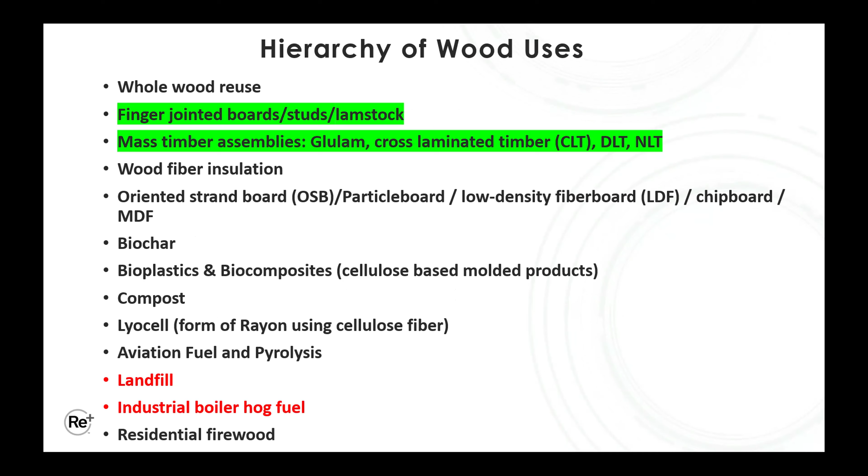Couldn't go to the next slide. So one of the things driving this really is the hierarchy of wood uses. You can see down in red at the bottom, most of the wood in our area currently is going to landfill and to industrial boiler hog fuel. We really want to see that material going to its highest and best use, which is whole wood reuse. Some of that is happening already.

There's some market issues, I guess, with widespread reuse of whole wood. We'll talk about that in a minute. So we're really spending more of our energy looking at ways to get wood finger jointed and made into studs or lamstock, and then into mass timber assemblies. We'll talk about that a little bit more too.

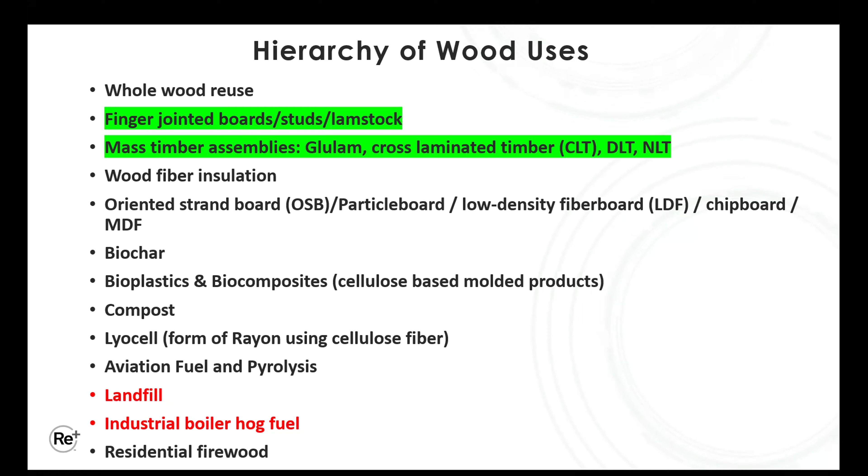So what's the opportunity? If you're trying to keep material out of the landfill, like we are in the King County Solid Waste Division, there's about 61,600 tons of clean wood that's ending up in landfill. We'd like to get that out of there and go into higher and better uses.

If you're trying to figure out where the material could go, we'd had some research done, and most of that clean wood that's going through the system is suitable for use in new building products once it's been processed. If you're looking at climate impacts overall in Seattle and King County, there's about 350,000 tons of clean wood going through the system every year.

That works out to about 1.01 million metric tons of carbon dioxide that would be eliminated through reuse, because almost all of that material right now is being either burned as fuel or landfilled. If you're looking at social cost of carbon, it's about $94, $95 million in value. If you're looking at the value of the wood, depending on how you price it and what the use is, somewhere around $70 million.

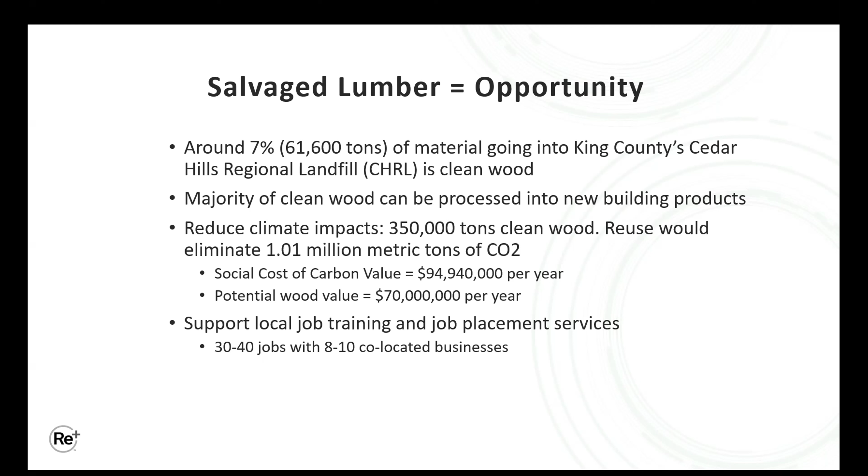And then there's a lot of jobs that could be created through transitioning to a circular economy for salvage lumber. Go to the next slide, Alex.

Here's a slide showing the circular economy for salvage lumber. Starting at the top right, you've got building deconstruction, then the basic lumber is pulled out of the buildings, and minimal processing happens initially. The wood would go to a salvage lumber warehouse. It could be finger jointed, then manufactured, and distributed back into construction.

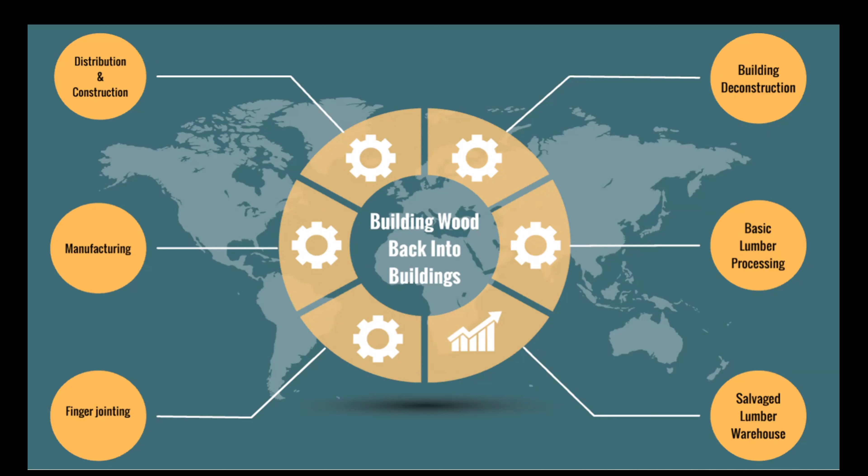I'll get back to you later on the methodologies for the carbon calculations, and I can make that available to anybody who's interested. Go ahead and go to the next slide.

One of the things I can go to is finger jointed material. There are some processes using stuff as short as 6 inches. We've been looking more in the 13 to 18-inch range. Go and hit the next button.

Once it's finger jointed, it can go into engineered wood products, mass timber assemblies, dowel laminated timber, etc. Going to go to the next slide.

So a few of the building blocks that have gotten us to where we are: clean wood is banned from disposal in King County and City of Seattle. We now have Washington State Building Code that allows for salvage lumber to be used without grade stamps, used at a lower grade.

Washington Building Code now encourages salvage assessments and deconstruction. There's language that permitting jurisdictions can adopt. There's a local deconstruction training program that King County has been doing. We're going to be doing the third round of that in March, probably, of this year.

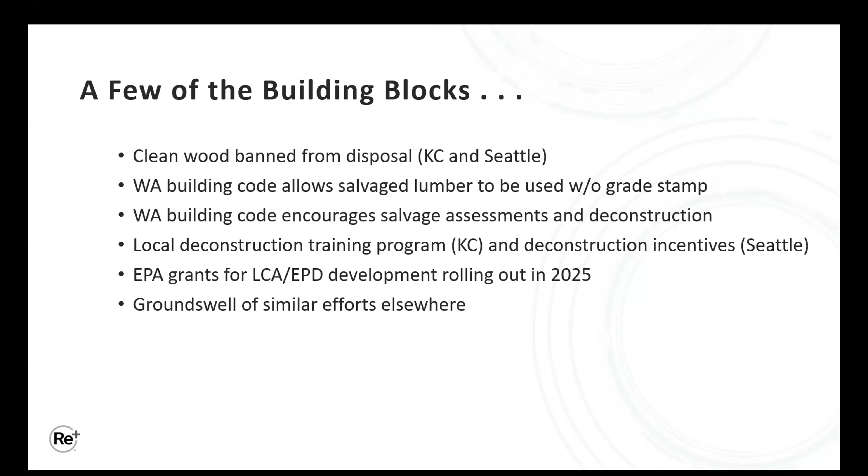Seattle has deconstruction incentives in place. EPA grants have rolled out and are now in place starting in 2025 for development of LCAs and EPDs - life cycle assessments and environmental product declarations. And there's a groundswell of similar efforts elsewhere. We won't go into a whole lot about that today, but there's a lot going on.

One of the big things happening is King County was awarded a grant from the EPA to work on decarbonization, and about 3.4 million of that is directly tagged for working on the circular economy for salvage lumber. Part of that is to hire a circular economy for salvage lumber senior project manager. We're going to be doing interviews next week.

There's money in there to develop grant programs to support these efforts, and also to develop sub-programs that support workforce development, product testing, and supporting manufacturers, primarily through grants for developing and supporting manufacturers of materials. There's also funding to work with development of environmental product declarations for new building products.

Next slide. City of Seattle got a solid waste infrastructure grant from the EPA for $4 million. The City of Seattle currently has requests for proposals out on the street. It's going to be a 3-year contract for about $4 million.

They're looking for somebody to collect, process grade inventory, and coordinate distribution of salvaged lumber, primarily recovered from residential structures, but it doesn't have to be. The city is expecting some outcomes.

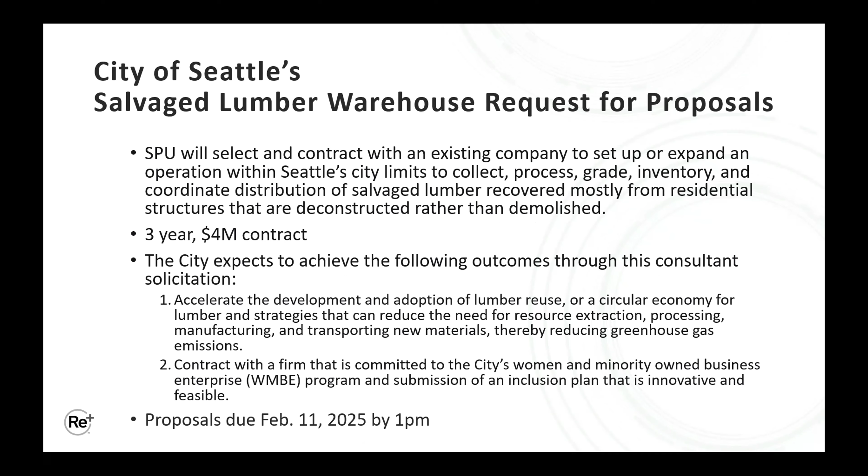Can go to the next slide. So, circular economy business park for salvaged lumber - this is a bigger concept that we want to make sure is on the table for today. The salvaged lumber warehouse basically works to get the lumber from the point it's harvested to the point where it could be used for something else. But if we can get co-location of a lot of these other businesses that are interested in utilizing wood or providing salvage lumber, the synergy will go a long way.

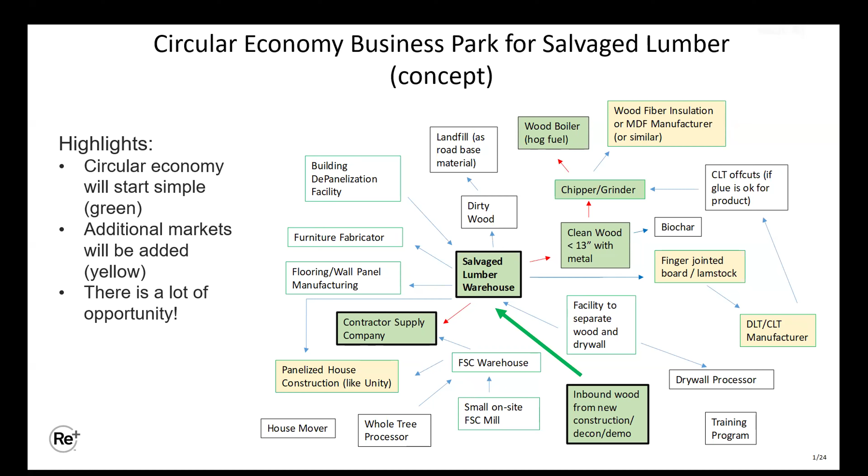You can see here in green would be a potential initial setup for the salvage lumber warehouse. Following that green arrow, they're just getting in lumber, and some of it's going directly out to contractors who are going to reuse it whole, and the smaller pieces initially might just get chipped and go to hog fuel because that's where the market is now. But once the salvage lumber warehouse is up and running, hopefully it can move to the next stage, which would be the yellow squares, making finger jointed material and getting into mass timber or some other engineered wood product. So that's kind of the vision we've been working with. Next slide.

One company might not necessarily have to have, or everyone's not going to have a forklift, for instance, right? This is a small example.

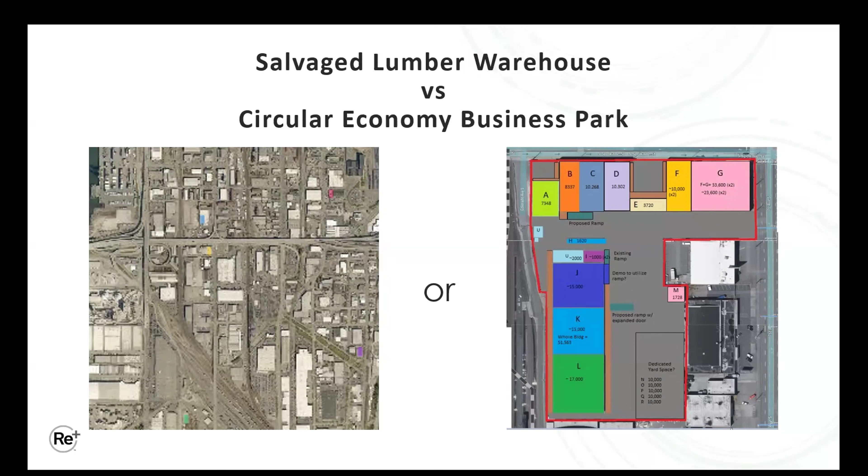We'll get to your question later, Brad, on FSC. Go to the next slide, Alex.

Yeah, that's it, basically. So that's a quick overview. If most of you, I think, have been following this process for quite a while, and our search for property and our efforts to try to pull all this together. But I wanted to overview this for everybody else. And yeah, let's go ahead and move on to our speakers.

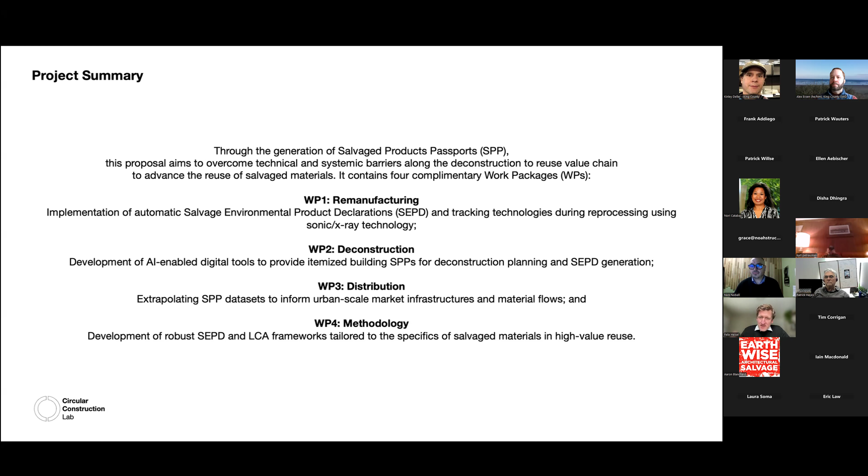And I'm going to use the next couple slides to simply show where we are at. Some of this work has started. Some of this is work from previous projects, kind of following the same scenario of these four scales.

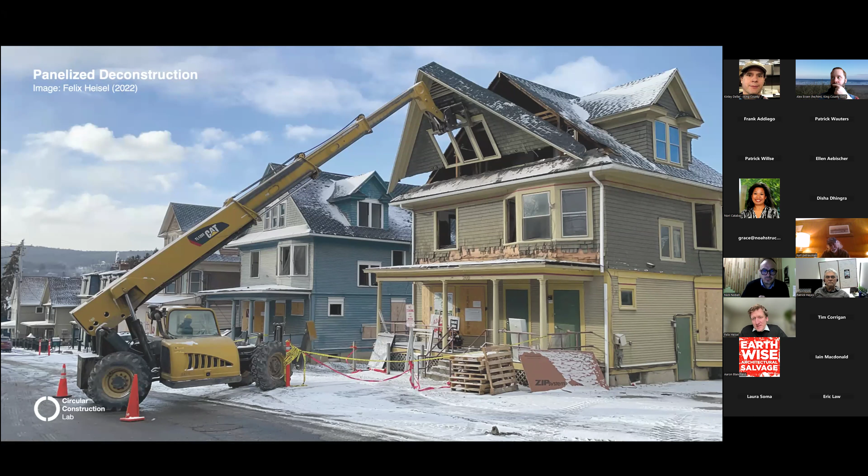So something that many of you have seen probably before is we're doing our own deconstruction projects just simply to understand and learn the limits and barriers of the harvesting of the materials and then somehow bringing them back into structural applications. For that, we're building case studies that are small, but that in this case, for example, the circulating matters installation that required a full building permit.

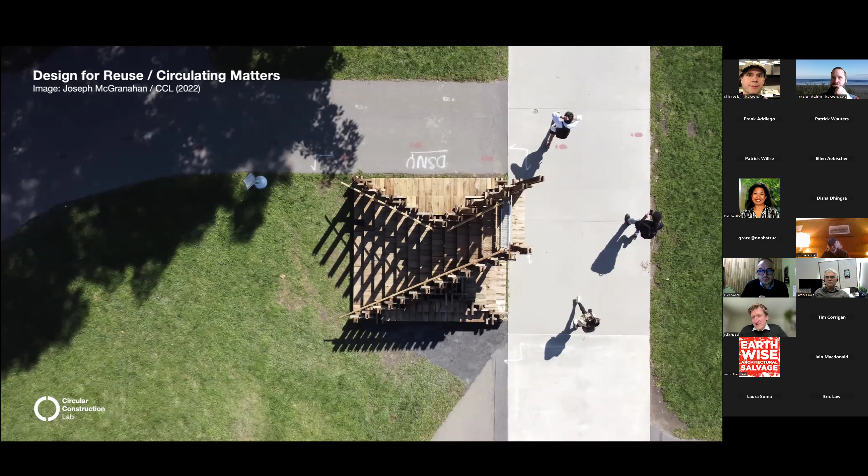So it asks us to go through the steps of the permitting and the structural engineering with these products and trigger the discovery of barriers in that process. And so when we look at the results of this research...

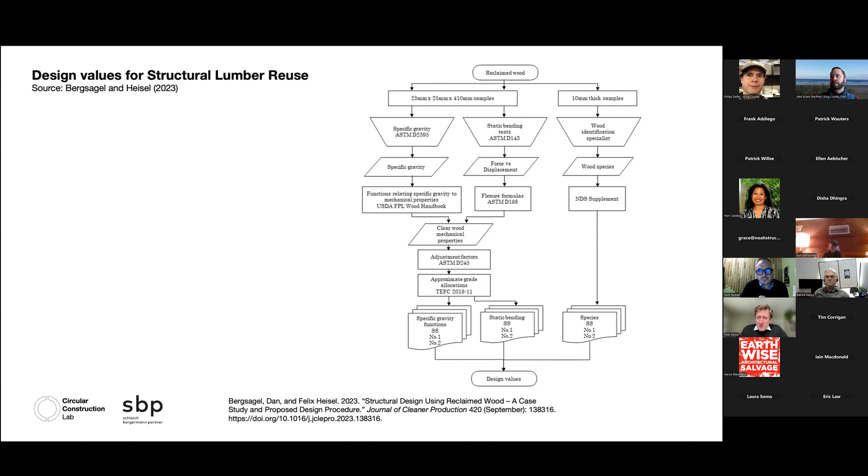One paper that just recently came out addresses the question: which design values do we even need to know about timber, about salvaged timber, so that we can use it in structural timber applications? How do we define these values and how do we generate them?

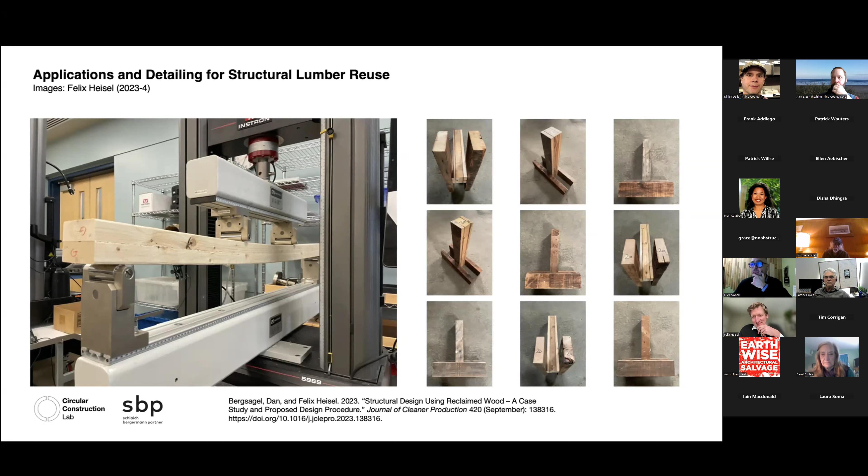Our idea is the question: can we do this without adhesives? Are there ways to combine salvage timber into structural products without the addition of formaldehyde containing and emitting glues? And then we're working on detection of problems.

This has to do with the need for visual regrading towards these EPDs and SPPs. These are first tests happening right now of the detection of holes and cracks, towards an automated process for regrading.

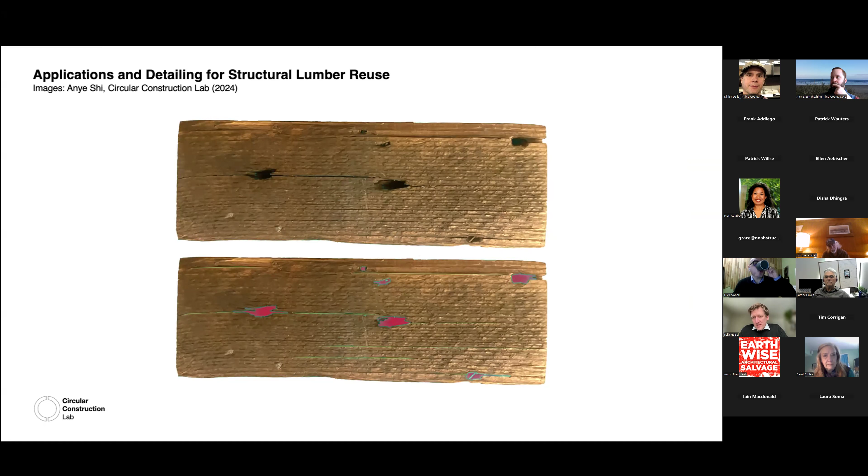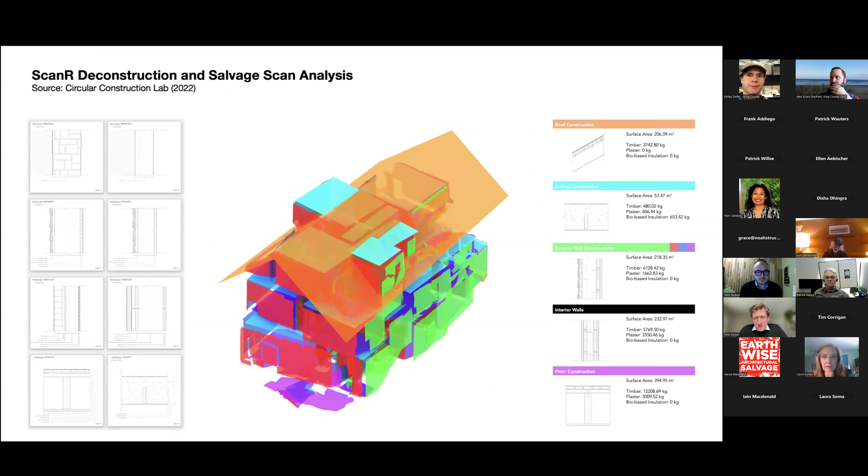On the larger scales, we're working with LiDAR technologies to detect material quantities in buildings to inform deconstruction processes, and then scaling out using these archetypes towards a better understanding of the urban mine.

What you see here is a kind of digital twin we generated of Ithaca, New York, and the materials contained in the built environment, based on where they are, what kind of materials they are, and when these buildings were built.

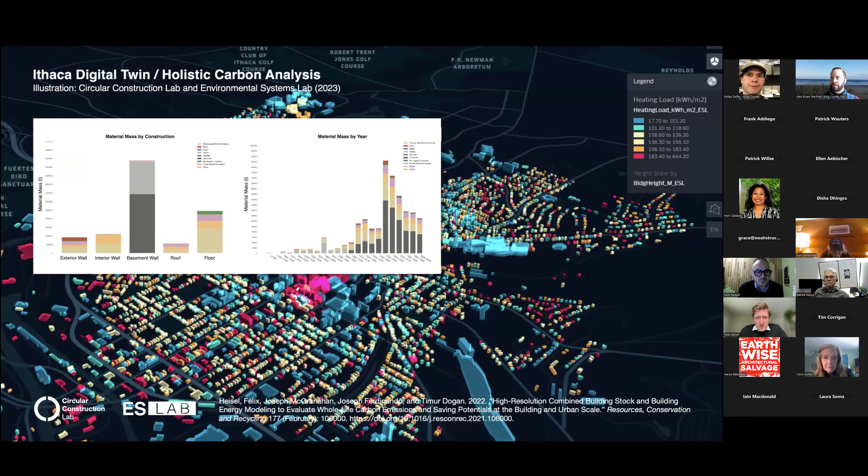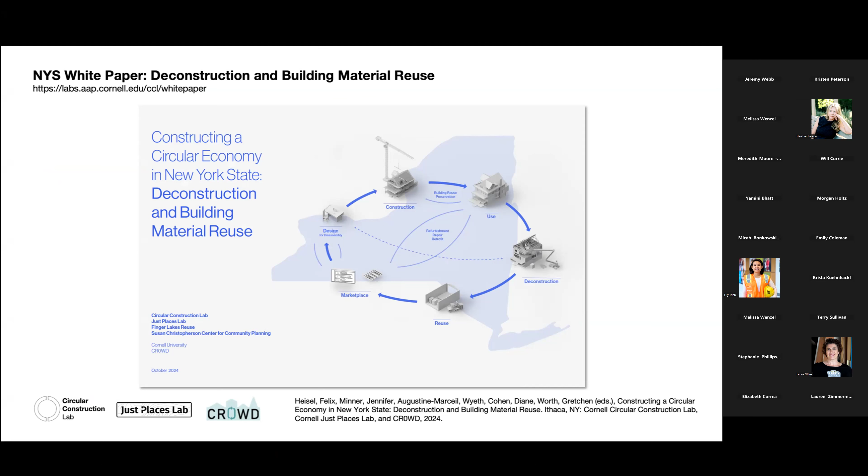Lastly, the question: what are the frameworks and methodologies we're addressing? We just recently published a white paper, free for download on our website. This is specific to New York, but maybe some of these ideas are applicable elsewhere, trying to understand the economic importance of salvage, deconstruction, and material reuse, and what policy recommendations we can put forward to change that system.

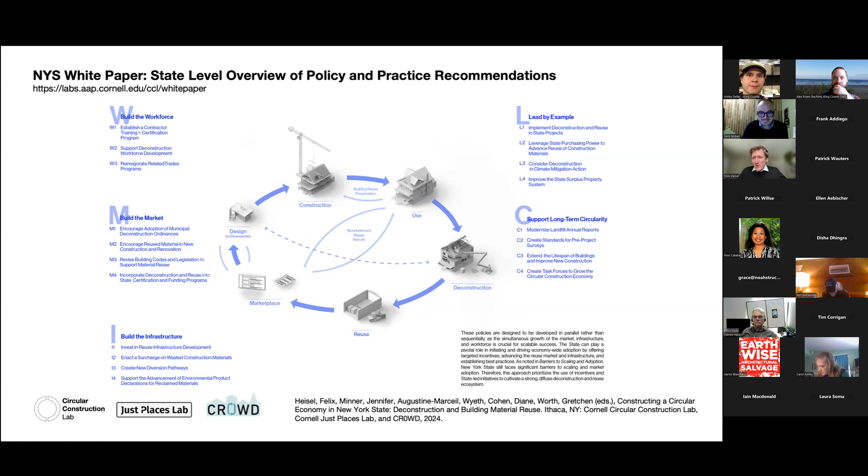This white paper puts out 19 policy recommendations along 5 chapters: building the workforce, building the market, building the infrastructure, leading by example from a state perspective, and supporting long-term circularity. If this is interesting to you, please feel free to download that document and ask us questions. This is an ongoing process, and we're really keen on that conversation.

I'll leave it at that. I'm really looking forward to the conversation.

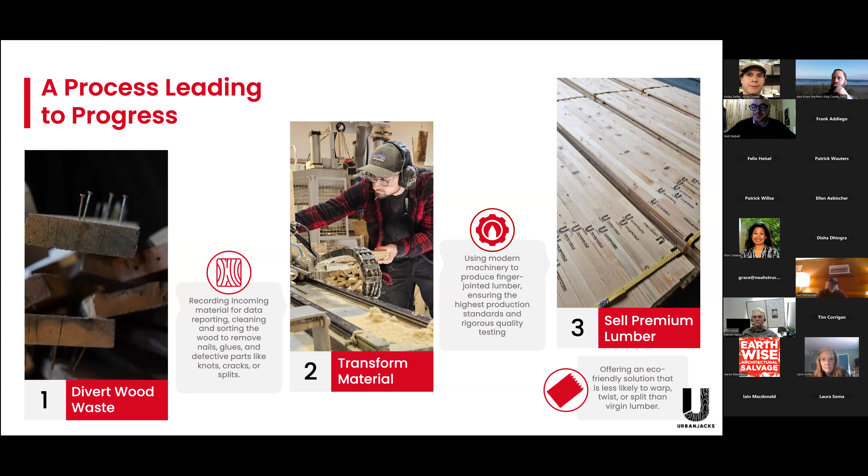In our business model, so inbound material, lumber sales—right now we're quite big in the film and TV industry, especially in Vancouver, as we start to grow into other industry segments, notably construction. As we want to expand into other markets, Seattle being quite close to us and close to home feels like an interesting step and something quite relevant for us to be a part of.

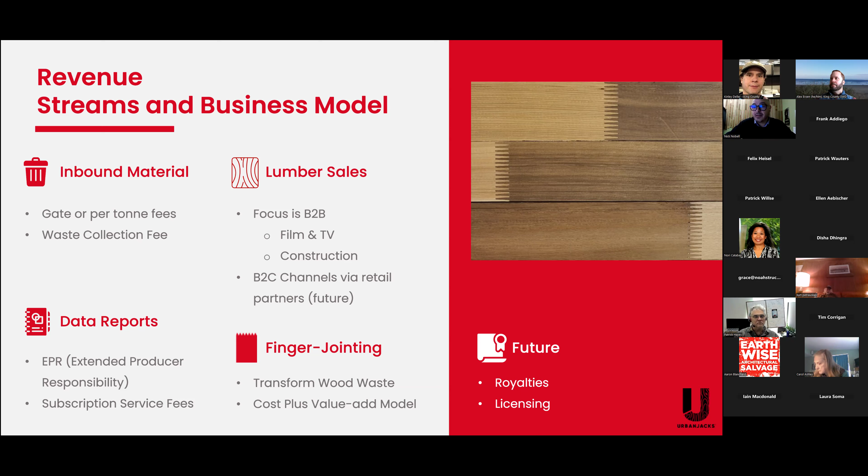We do a lot of data reporting, and that's one of the core activities we do, because it's really with data that you can prove you're improving the status quo. And then finger jointing, basically as a service as well. I'll leave it there since we have a short agenda, and I'm happy to answer any other questions afterwards. Thank you.

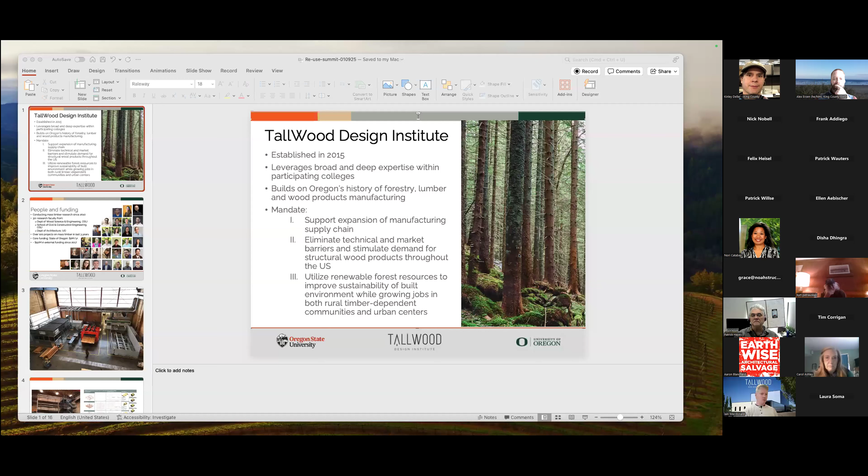Yes, great. Alex asked me to say a few words about the work we're doing down in Oregon. Tallwood Design Institute has been around for almost 10 years now, established by the state of Oregon to support expansion of structural wood use where appropriate, and also support expansion of the manufacturing supply chain in Oregon, given the state's historic dependence on the forest products industry. We do this work through applied research, applied education, and outreach.

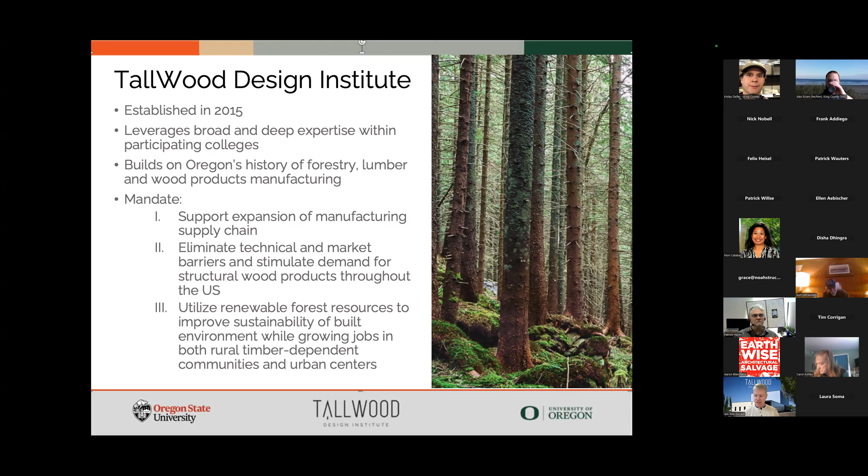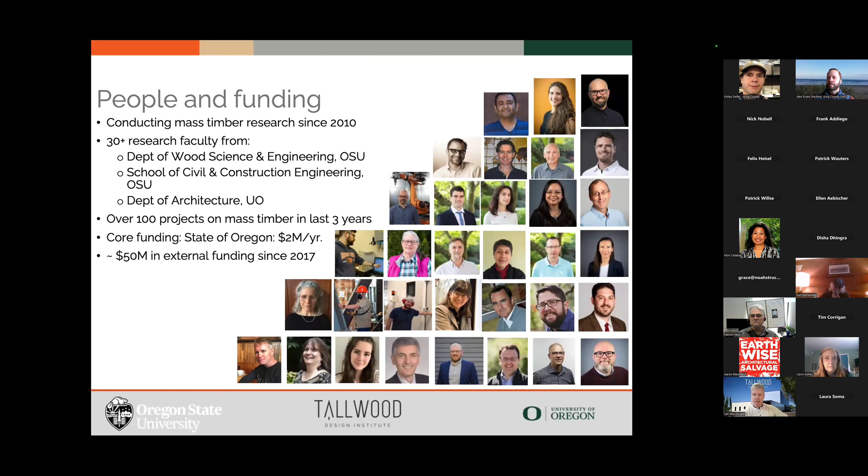We work across the disciplines of forestry, wood science, structural engineering, and architecture. The two universities involved in the partnership are Oregon State University, where I'm based, and the University of Oregon, an hour down the road in Eugene. We have many faculty working through our network in these different departments and schools, and we've done around 100 projects, with a lot of focus on the mass timber space, just because that's the new shiny object in structural wood products.

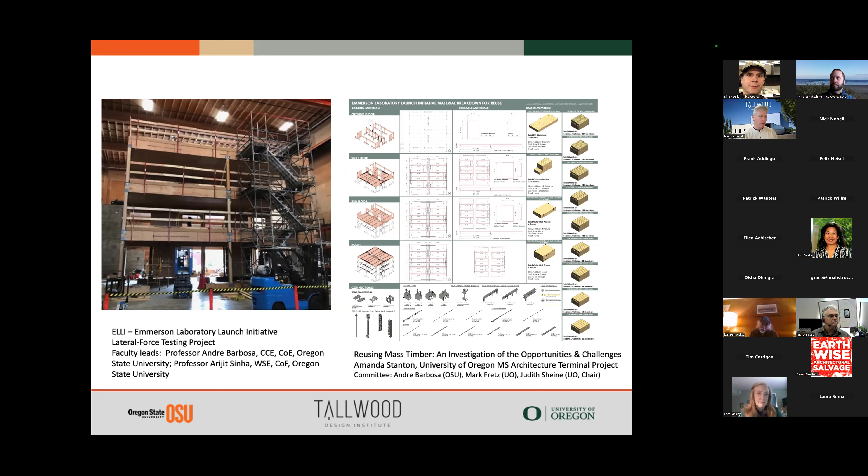Because these mass timber members would have to be structurally recertified for use as structural elements, we chose to work towards a non-structural application—in this case, Highland Hall in Portland, which is the Department of Architecture's new home in Portland.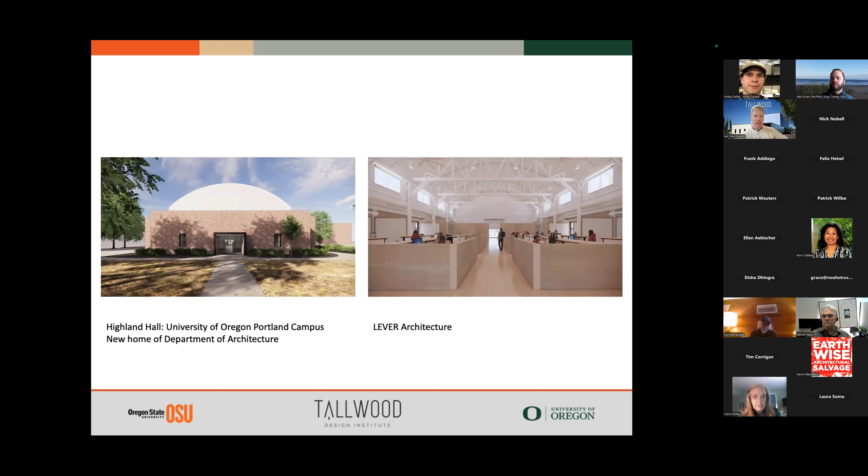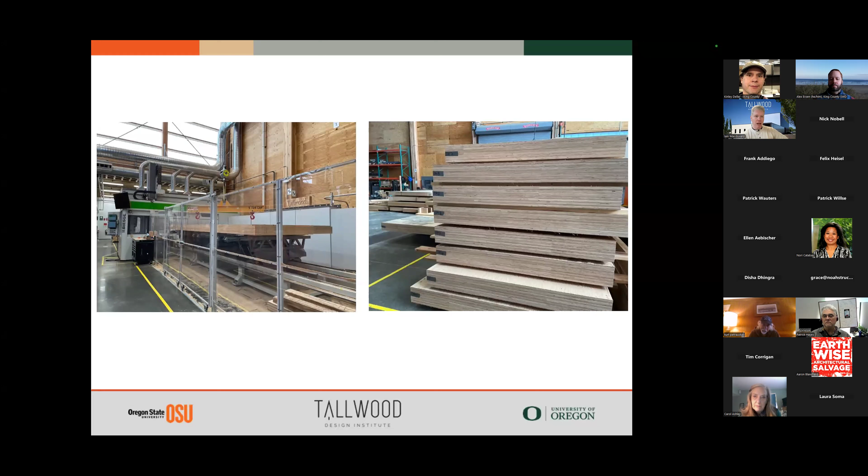And the dividers and conference room pods that you see in the interior of this space were fabricated through this kind of reuse process. We use this large CNC that we have in our lab to remanufacture mass plywood panels into the dividers and conference pods there. You can see some of the work happening and some nearing completion. We did an LCA of this, looking at the environmental impact compared to using gypsum partitions.

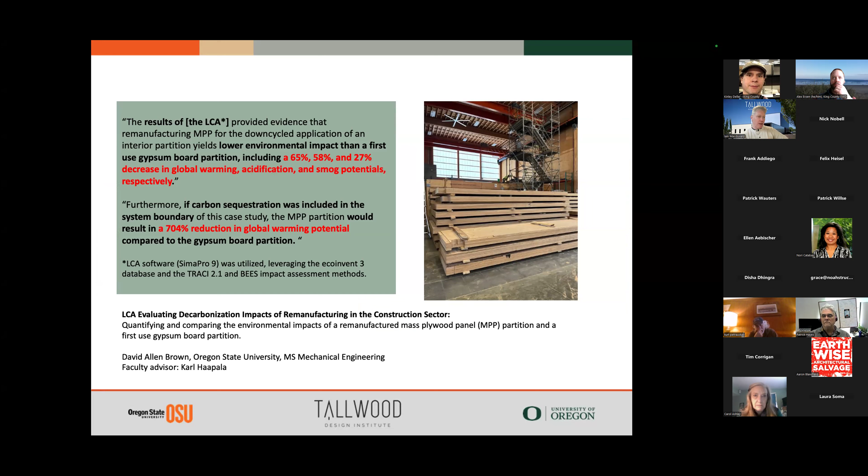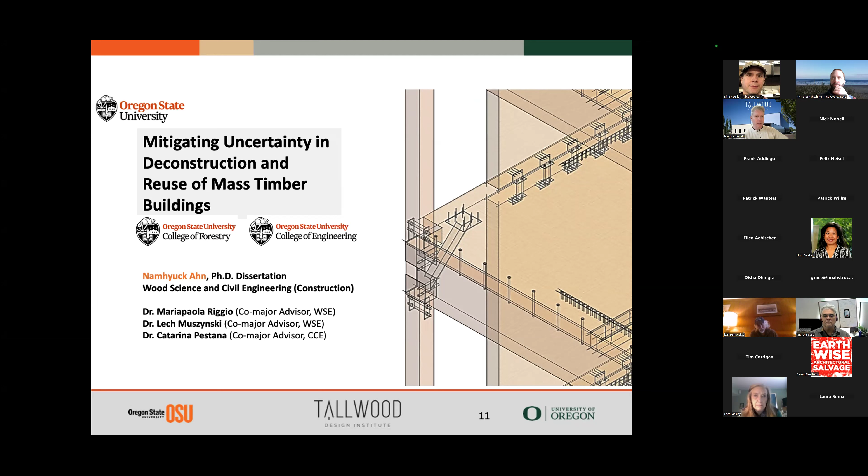That information is available. We also had another PhD student use that as a case study for looking at decisions around deconstruction and reuse of mass timber buildings.

Going back a little further to 2017, a student, Rafael Arbelaez, did some work taking salvaged lumber and then testing it to evaluate its applicability for use in mass timber. We actually created some panels in our lab scale press and tested them. The takeaway was that yes, it's often very high quality material.

96% of samples were sufficiently stiff to meet minimum requirements for the E3 grade CLT panels. The problem really was the immaturity of the supply chain, meaning the material itself ended up being about 3 times as expensive to source as using virgin fiber, which is probably not a surprise to this audience. We have an industry consortium based at OSU, 20 companies in the mass timber space actively collaborating on applied research and development of common interest to all.

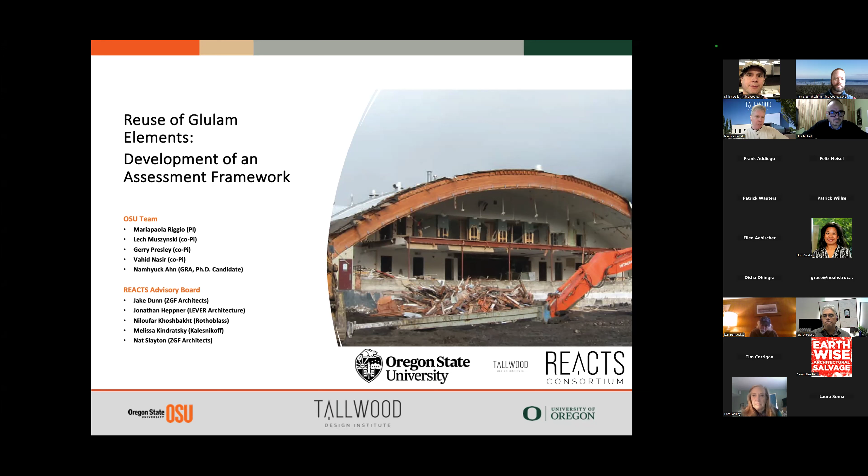Underway right now is another study to look at reuse of glulam elements. There's not too many results to report from that yet, but if anyone is interested in following that work, I'd be happy to loop you in.

Alex asked me to touch on the fact that we're not restricted purely to Oregon. Our two universities have been working since 2020, roughly, with other entities in Oregon around this mass timber coalition. We're working on various economic development focused projects to grow the mass timber industry broadly in Oregon, and we're working off about a $40 million Department of Commerce Build Back Better Regional Challenge Award that came to us in 2022. The catalyst for us getting together were these devastating wildfires that happened around Labor Day of 2020.

Building on that, in 2023 we partnered with Washington State, and so we now have a very active collaboration and a designation as an EDA tech hub. That's the Economic Development Administration's place-based investment program funded by the CHIPS and Science Act. I just wanted to signal that we have, I think, 86 entities across the two states that have signed on to this tech hub.

And we're currently updating market studies and looking at various activities together. The overall goal of that is to take the early leadership of Washington and Oregon in the mass timber space. Nationally, we're the early adopters and leaders. Within 10 years, the aspiration is to become global leaders, or a globally competitive region of manufacturing in that area.

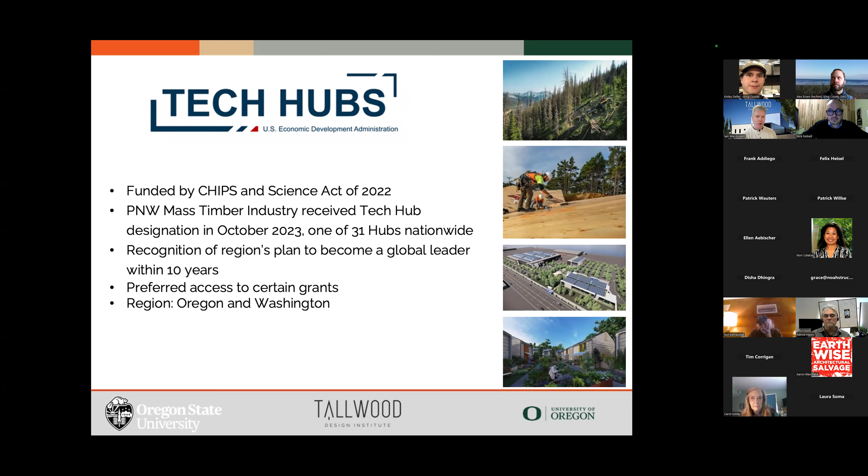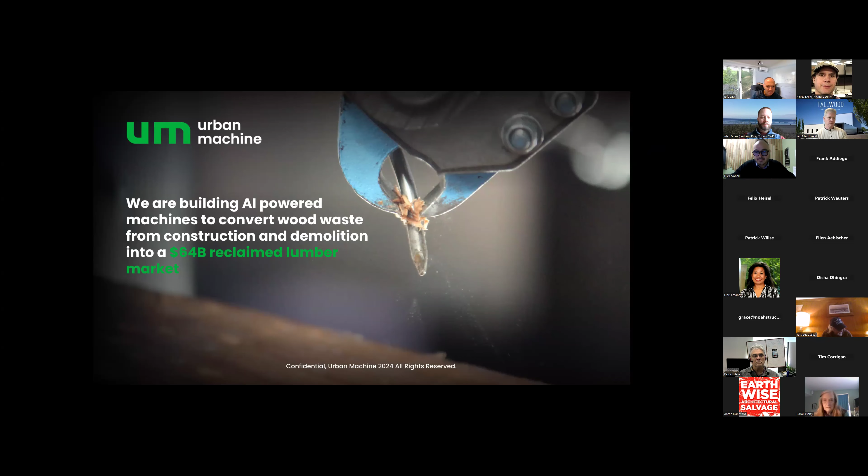We are the guys building the robots to remove the nails, screws, staples, the metal from the lumber, so we can take lumber from a linear stream to a circular stream. This is our core focus here at Urban Machine, enabling people to recycle and reclaim more of it than currently turns into hog fuel.

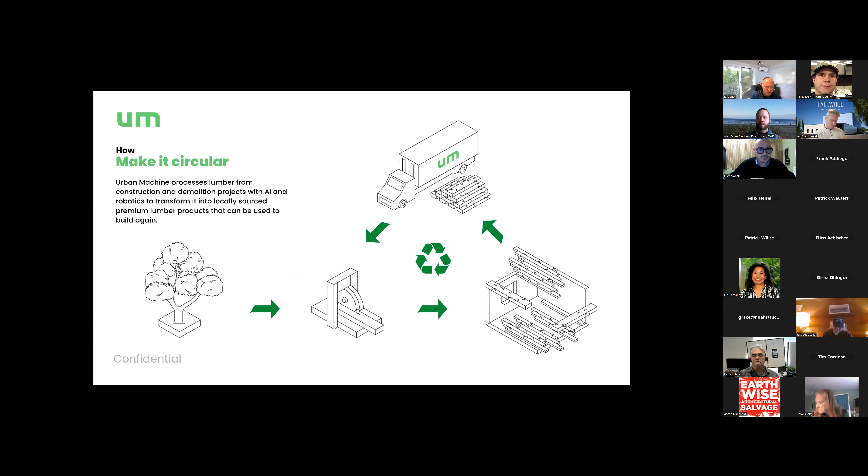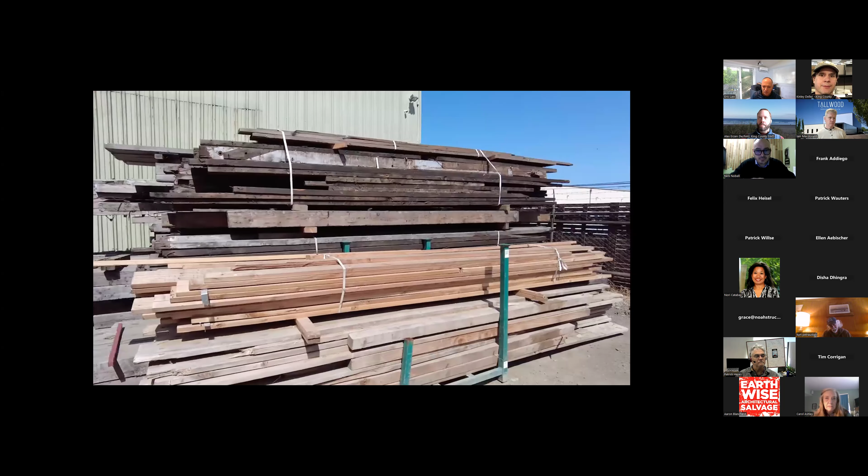Quick update for you guys on our machine. We released a new version last spring of our machine. It's currently operating at All Bay Mill and Lumber in American Canyon. So we're taking in full-time lumber from contractors, waste facilities, newer lumber, older lumber, all different ages. We've had some different species come through our facility now, some older growth oak, and we're cleaning it full-time at the operation to prove the technology. The machine has 3 steps now.

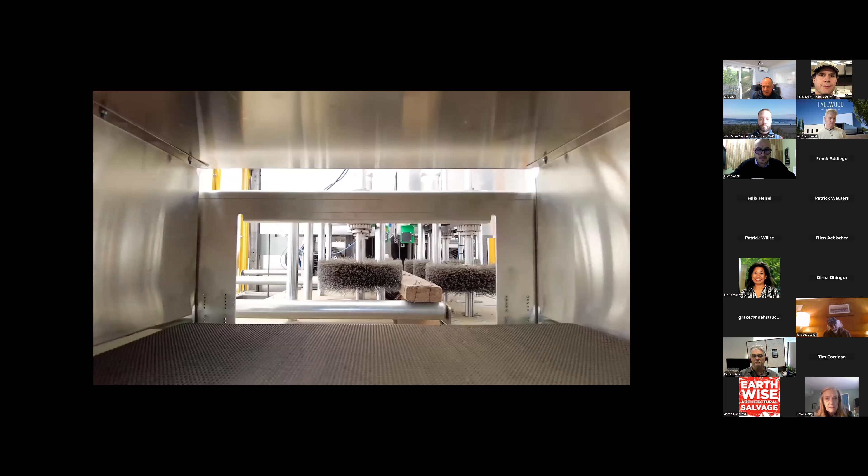The first step is cutting all the metal fasteners flush with the wood. The second step is cooking them all, so then we can extract them much easier, reduces the friction force, and this is a huge enabler for the screws. And then the third step is using the picker here to pull them out.

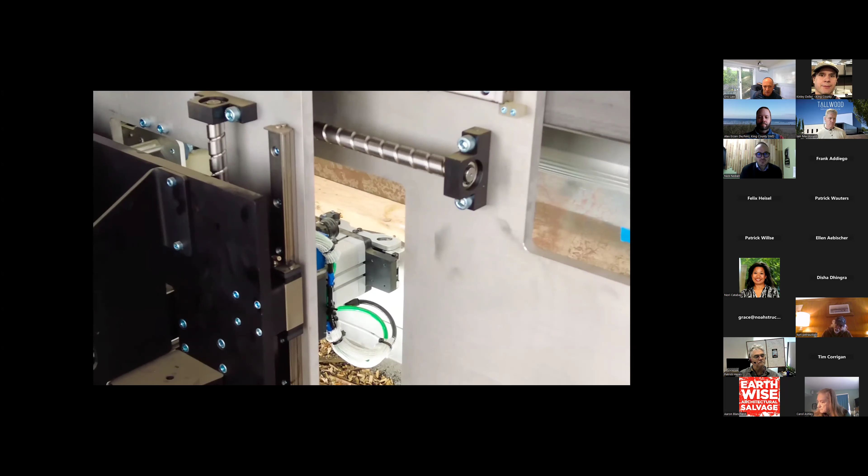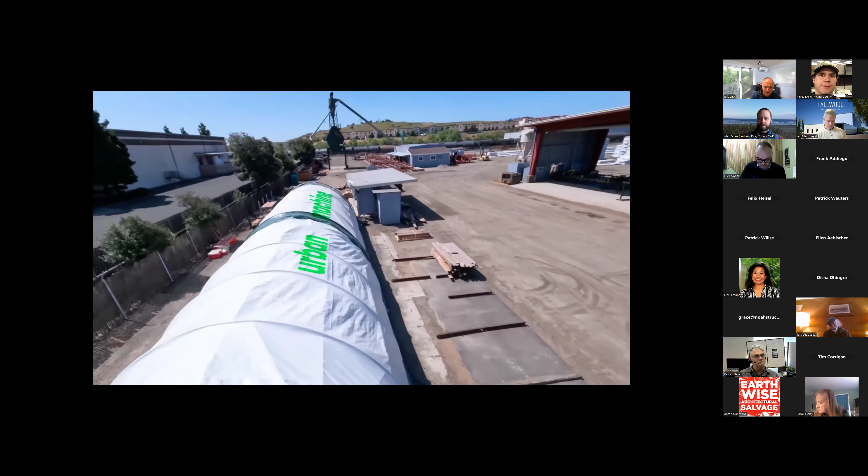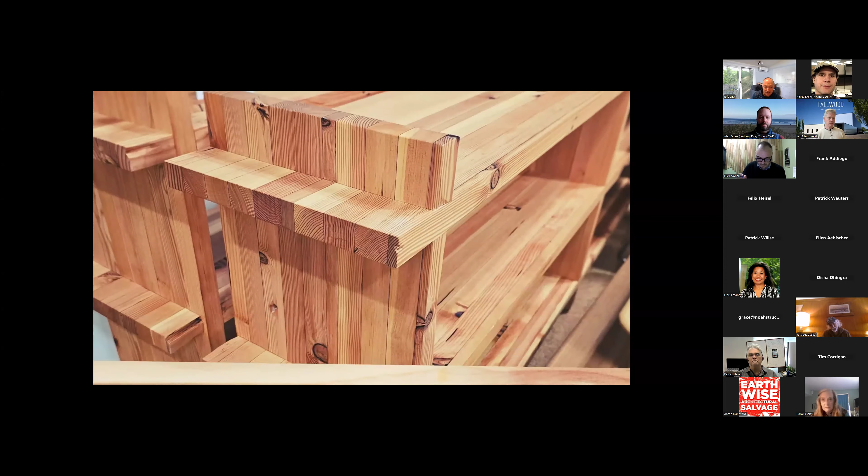The goal is to get lumber metal free at a price competitive with virgin lumber. Right now, we're selling wood for 80 cents to about $1.50 a board foot, depending on the dimensions. So we're almost there compared to virgin lumber FSC certified wood. We are FSC certified for chain of custody for our material that we process, and getting it clean for you. We've made a lot of great progress, and we're currently in negotiations to lease and rent our first machines to other operators. So if you're interested, reach out on that.

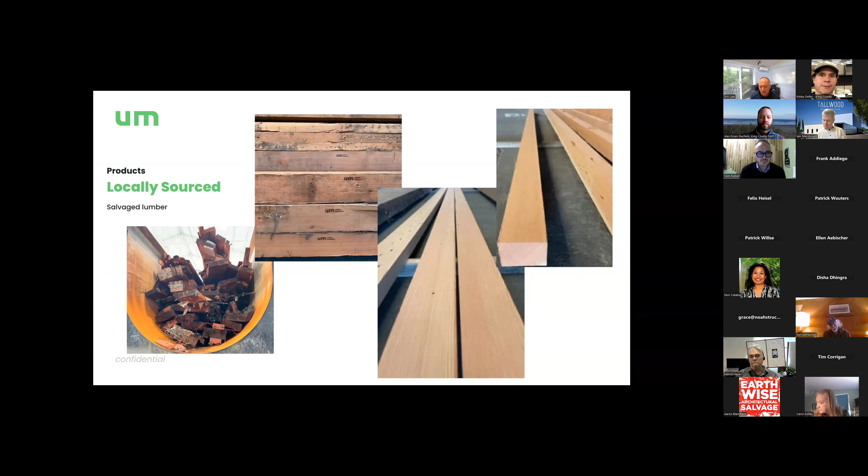In the meantime, in addition to the machine, we've also been turning wood into products. One of the big challenges is we have a massive amount of material. We're doing solid sawn lumber and glulam that's running through our facility. But what do you do with all that material?

One of the tests we did is we sent a truckload up to Brightwood in Madras, Oregon, to get it finger jointed. It's come back to us, and now we're selling finger jointed 24-foot long 2x4s and 2x6s through our facility and in partnership with All Bay Mill and Lumber. So we took a lot of the 6 and 7 footers that we end up with from the waste stream, and we turned it into 24-foot boards.

We're targeting contractors with this material for things like temp structures. It's got a cool appearance to it. You can see the staggered pattern there on the right.

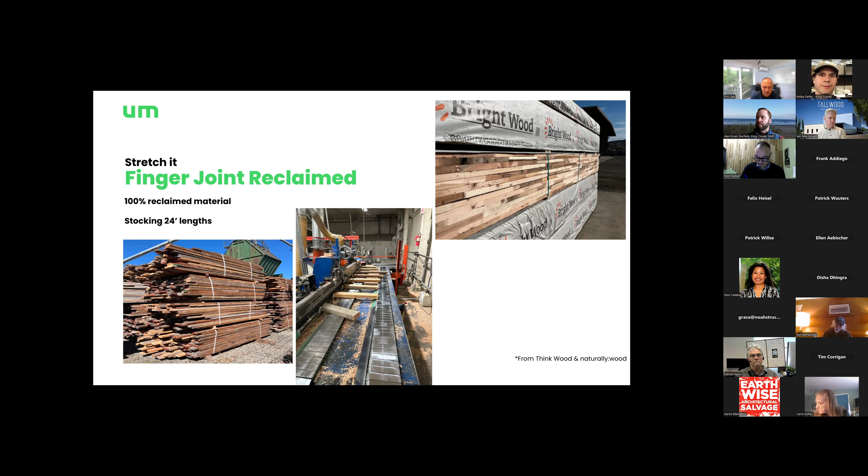The other product that we're building in partnership with All Bay Mill and Lumber is DLT. We spun up a DLT machine there at All Bay, so we're creating DLT wall and ceiling panels. And then we're also doing glulam blocks as well.

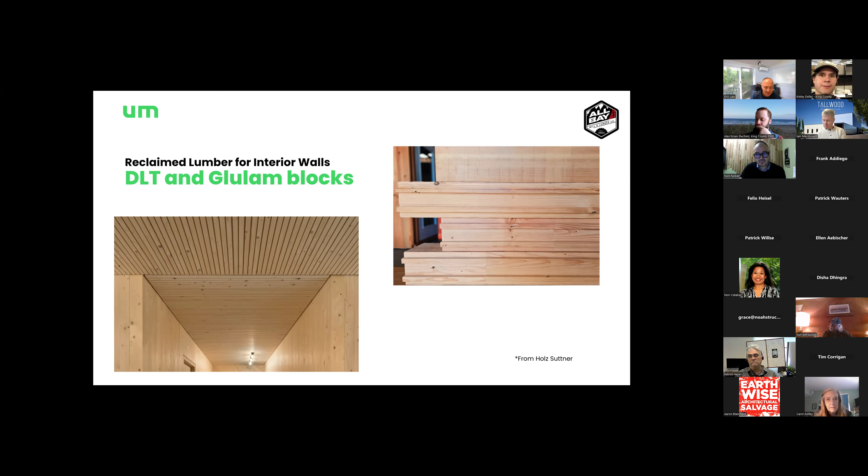A little bit more information on the DLT here. The awesome part about DLT is the only time it has glue is if it's in finger joints on that one. And then I'll turn it over to Frank to chat a little bit more about his operations there at All Bay and some of the DLT.

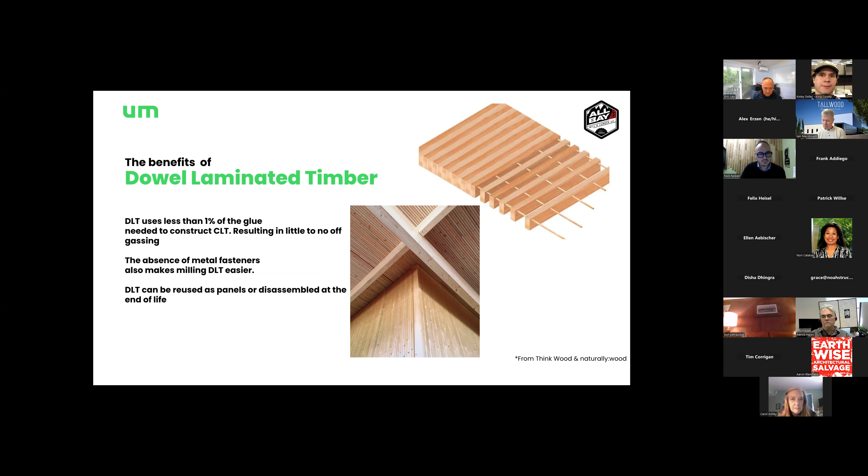Been very excited to sell to our customers the reclaimed lumber that Eric's machine has been able to do. We've produced some beautiful interior applications for stair treads, wall paneling, and actually architecturally surfaced roof structures.

In addition to my involvement with Eric and through an introduction with Eric, we've also been doing some urban forest salvage, where tree companies are bringing in logs and we're processing them here and selling them into the same channels, architectural uses, not structural uses just yet, due to the inability so far for our industry to grade this stuff as structural use.

So I've been very blessed to have been working with Eric, and he will be taking All Bay into the next chapter of our future. So thank you. Awesome. Thanks, Frank.

This is Frank's mill. This is an example of what's under the covers in this reclaimed lumber that we're processing. He took these 4x12s, ran them through his planer, and you can see the beautiful wood that's on the inside. This is coming out of buildings here in the San Francisco Bay Area. Then we denail it, remove the metal fasteners so it can run through the planers without damaging the blades there. It's really cool to see it in action and running these days.

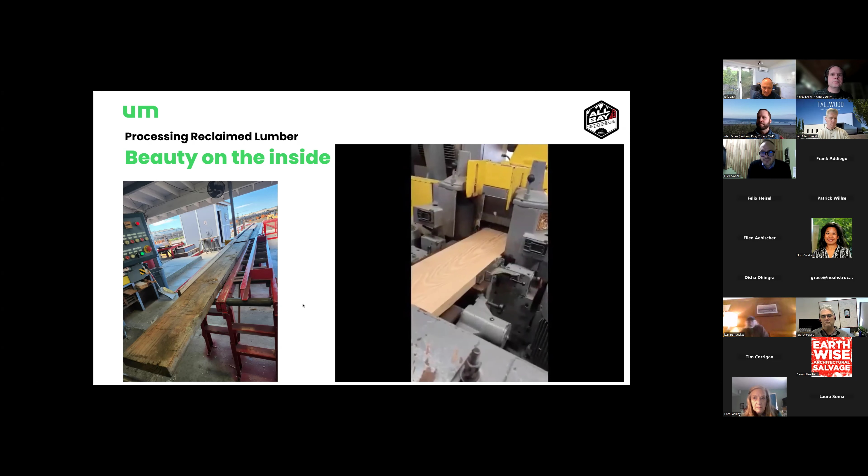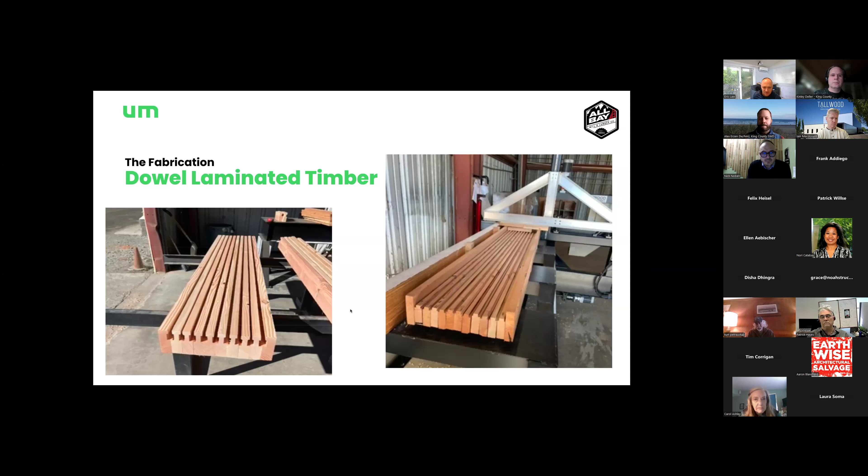And then a little bit more on the glulam blocks there for you guys as well.

One of the big things for us is really driving demand. That's the big challenge in the reclaimed lumber industry: how do you get people away from specifying one piece of wood for a fireplace mantle to saying, hey, we want to use it in engineered products, in buildings, in walls, so we can drive the volume up. We're doing a lot of education with architects and contractors on where and how they can use it. It can be regraded, but that requires an extra step and a certificate. We're spending time with structural engineers to get this material back, because there is no shortage of raw material - the volume out there is massive.

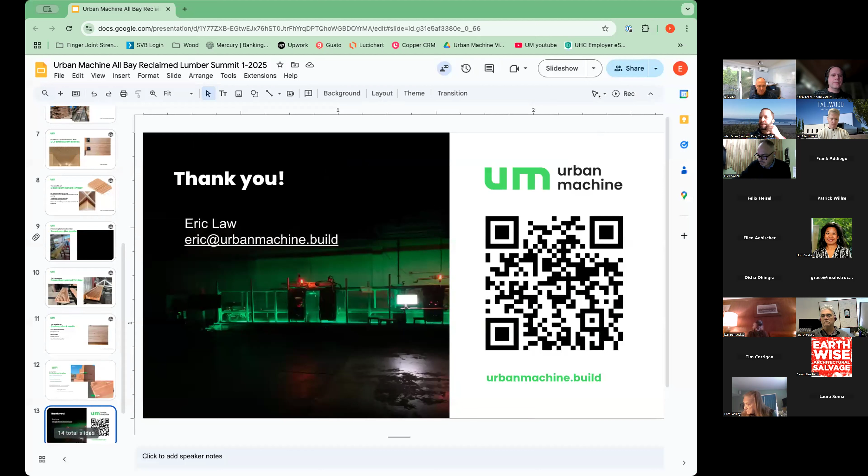That concludes our wonderful presentations from all these interesting folks doing great stuff around the country, and we're hoping to get more of that happening here in the Seattle area. Kinley, did you want to say a few words?